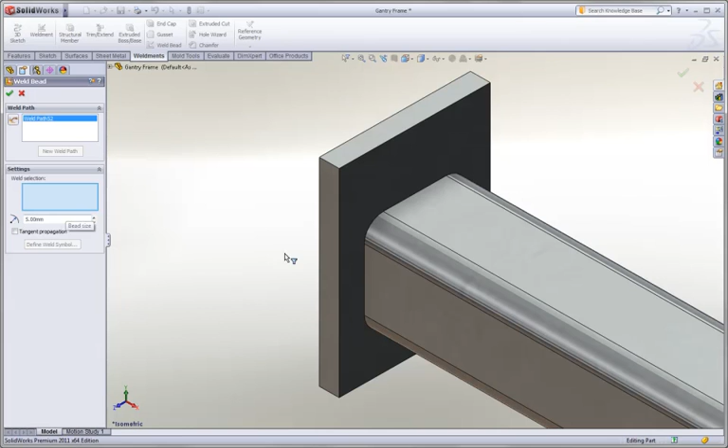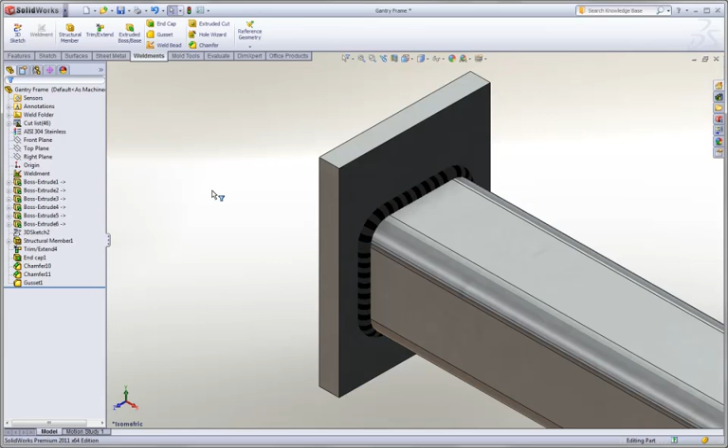All we need right now is a bead size and to select two components that intersect with each other. SOLIDWORKS automatically finds the intersection of those two faces, but we have further refined choices, such as all around in this case. You can see that SOLIDWORKS creates a nice bead around this intersection, but more importantly, it's a lightweight cosmetic weld. It's no longer a solid body like it had been in the past. That means for your complex welded frame designs, there's no longer an extra burden on the system to include your welds, so feel free to add them wherever necessary.

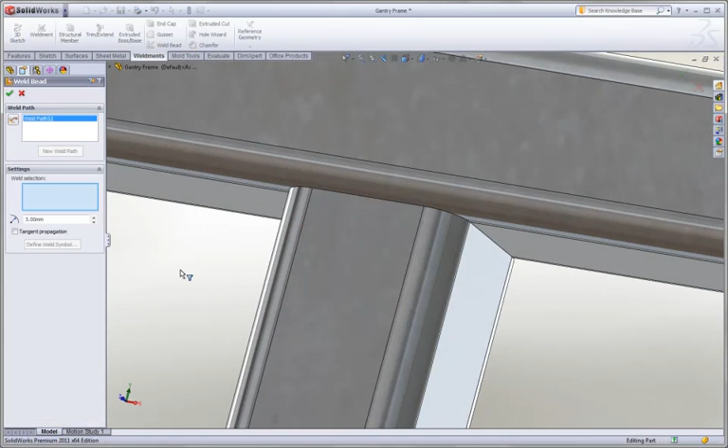We'll look at a slightly more challenging scenario. In the case of these two tubes that intersect at a perpendicular intersection, there's a slight gap there. SOLIDWORKS no longer has any challenges with these cases. Simply select the two components like before, and SOLIDWORKS creates the weld with ease.

If we want to exaggerate it a little bit more, we could look at a case where there's actually a full gap in between the two tubes. And just as you would expect, SOLIDWORKS is able to tackle this as well.

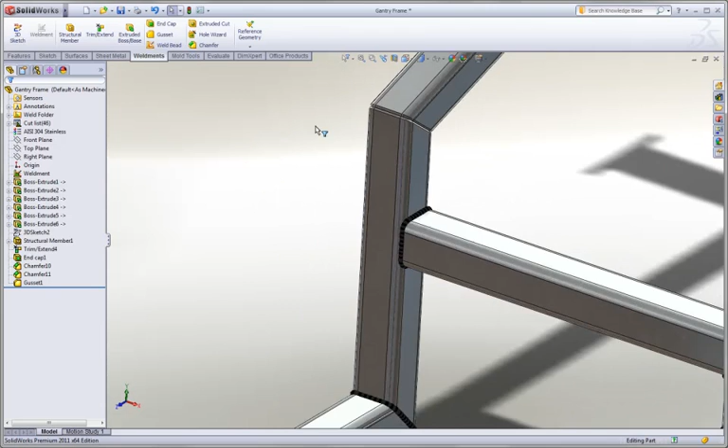But it's not just limited to these simple fillet beads. What about a groove weld? In this case, we already have some weld preparation included into our design. We're just going to select the two inside faces of the groove, choose all around as we did before, but this time we're going to modify the weld symbol slightly. We're going to specify this as a V-groove weld. SOLIDWORKS fills in that groove just as we would expect.

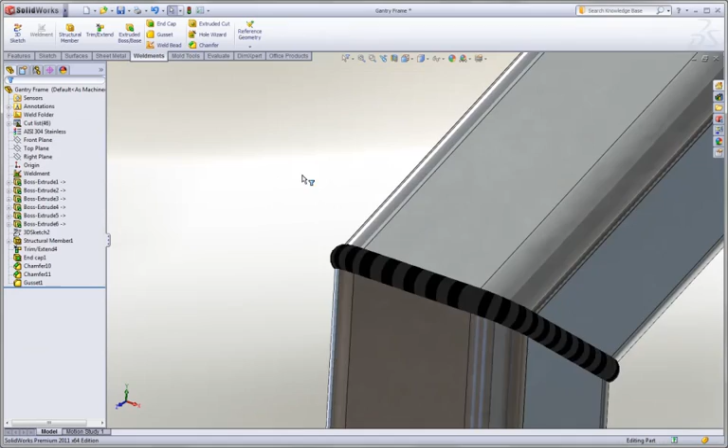For a slightly more complicated scenario, or more detailed weld, we may want to go ahead and put some staggered or intermittent welds on here. The new weld bead tool handles this quite well also.

We'll simply choose this gusset and this tube, and below you'll notice that we can choose both sides where we've been selecting all around before. Below that we can choose intermittent weld and specify this by gap and weld length or pitch and weld length. In this case we're going to specify a weld length and a pitch.

And finally, to really clean it up, we'll add a staggered weld to it to give our design a little bit more rigidity.

One thing we haven't seen while we've been adding these are the annotations that are created. You'll notice that for every weld, SOLIDWORKS creates the appropriate weld note annotation. It not only includes the weld symbol, the weld size, but also the weld length, the staggered value, and even the staggered annotation on the note.

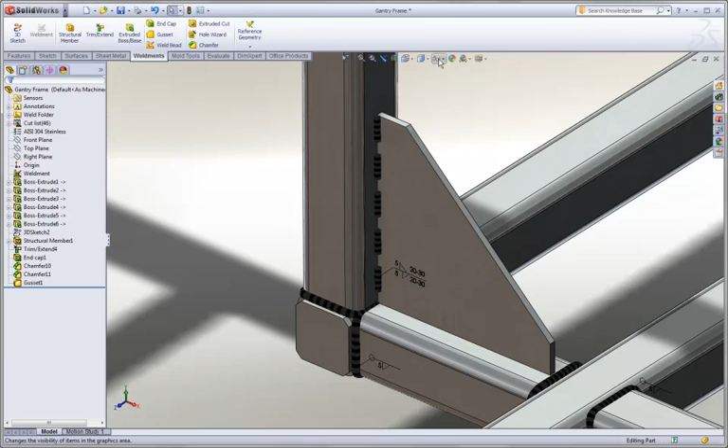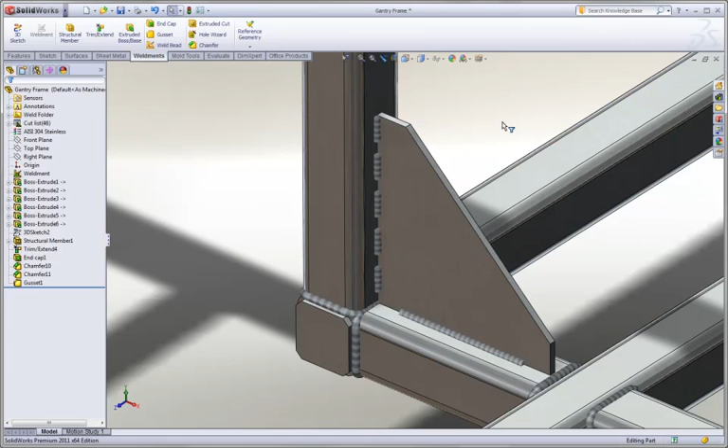One more weld we want to create here is going to be a from-to weld. In this case, we'll choose the gusset and the tube, and we can see that when we choose from to, we get a nice convenient instant 3D-like user control. We simply grab the arrows, drag them to where we want them to be, and hit OK, and SOLIDWORKS creates the nice appropriate weld. Weldments are great at the part level, and we've been able to do this in SOLIDWORKS for some time.

But the really new and exciting thing in SOLIDWORKS 2011 is the ability to create these exact same welds inside of the assembly environment.

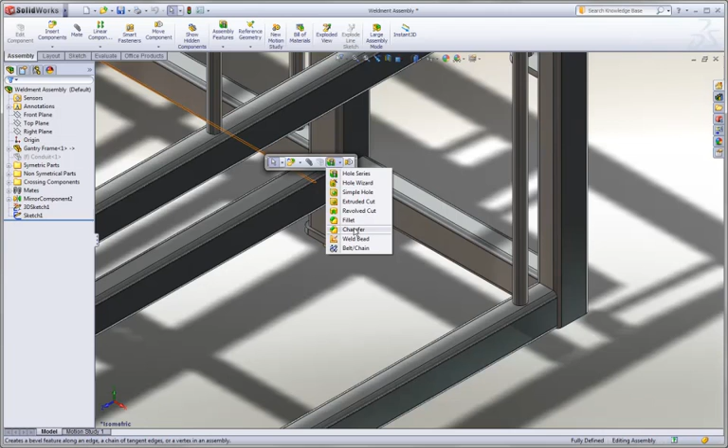To do this, however, we may need to incorporate some things such as weld preparations. To accommodate this, SOLIDWORKS 2011 now supports fillets and chamfers at the assembly level. To make this easy, we'll just create some chamfers on all these tubes that need to have welds applied to them. Simply selecting these faces, we can see that SOLIDWORKS creates this weld preparation with ease. This means that your designs more accurately reflect what it is your final product will be.

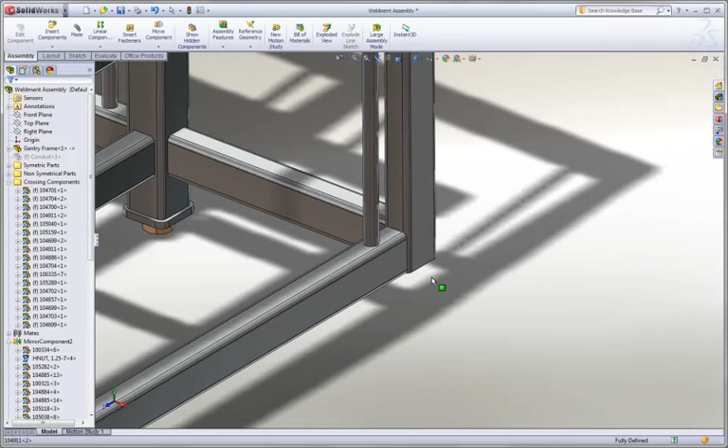To finish this off, we'll add a couple of those weld beads here at the assembly level using the exact same tool we used before.

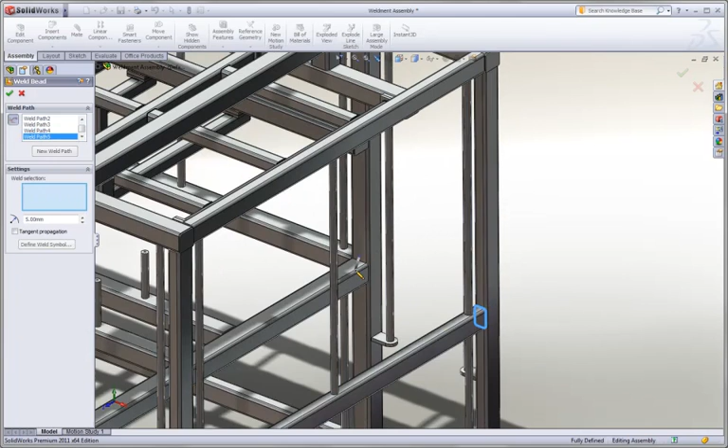One of the things we haven't seen up until now is the new Weld Quick Selection tool. We can see that with this button we can simply drag and drop across the intersection of any tubes in our design, and SOLIDWORKS automatically creates the appropriate weld where necessary. We'll hit OK, and we'll see that SOLIDWORKS now quickly created many more welds than we had before in a single step. This means it's extremely fast and easy to add these welds to your complex designs as well as lightweight.

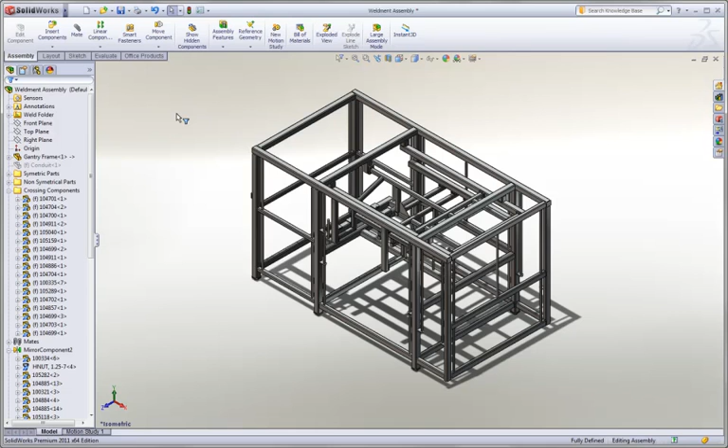Finally, no weld design would be complete without some documentation. New enhancements to drawings that directly affect welded designs include changes to the weldment cut list table. A bill of materials in an assembly has a lot of capabilities, and we see more of them moved over to the weld cut list table.

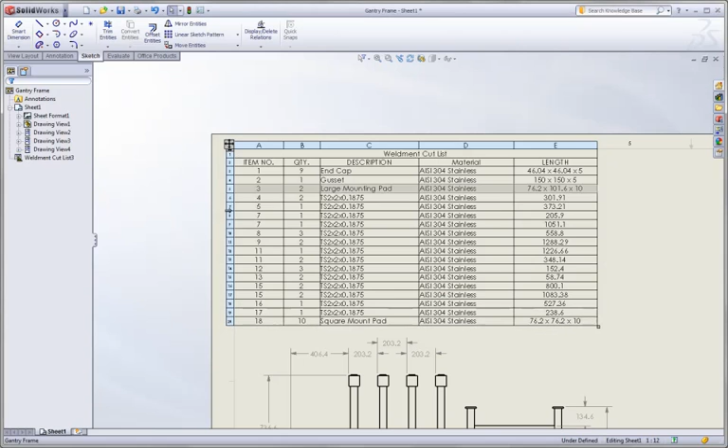We've always been able to do a simple sort on a weld cut list table, but now we can further refine that with simple drag and drop operations that allow us to intuitively reorganize our welded cut list.

The other thing we want to look at is how do we document all those welds we've created in our gantry design. A new type of table is available called a weld table. Simply go ahead, choose the view, and drop it on.

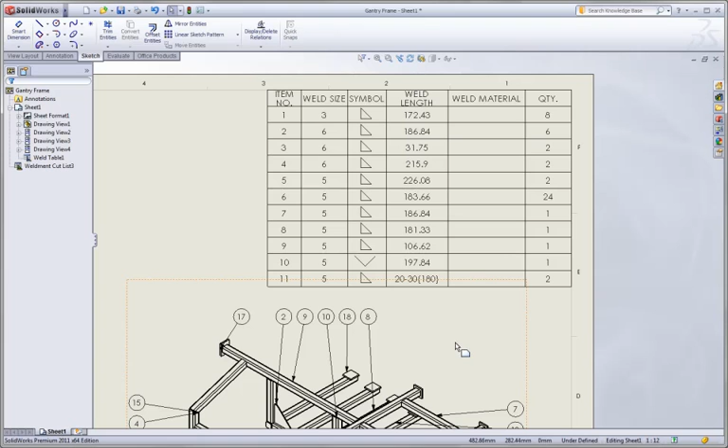We can see that this table includes things such as the weld symbols, the weld length, the quantity of welds, and if we had included material, that as well. It even captures things such as the intermittent weld as well as the V-groove symbol here.

Hopefully all these new weld design tools will allow you to be more flexible in how you create your welded designs in SOLIDWORKS 2011.